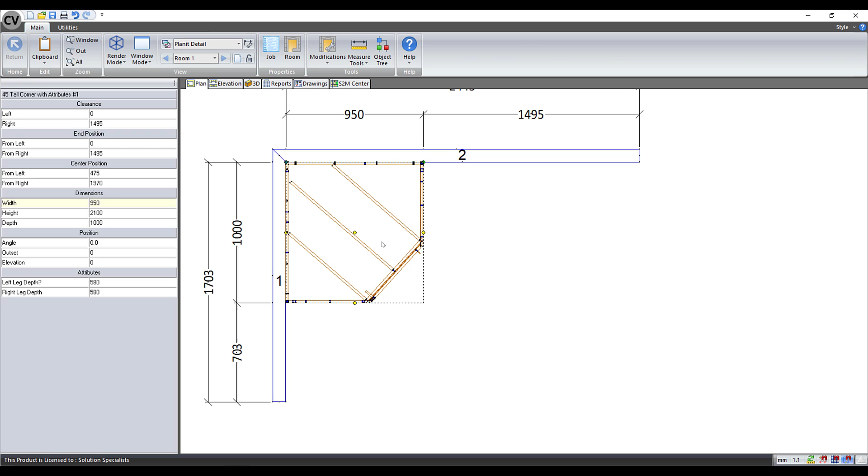Throughout this lesson, take a look at the cabinet properties within our section editor. For this lesson, we'll use our 45-degree pantry, and we're going to recreate a walk-in pantry using those cabinet properties. I'll get back into my cabinet view, go to my section editor, and I'll go to our cabinet properties. You'll see this by going and clicking on properties, and you'll see a drop down appear. For now, I'm going to select general, but just have a quick look and remember some of the names on that drop down list.

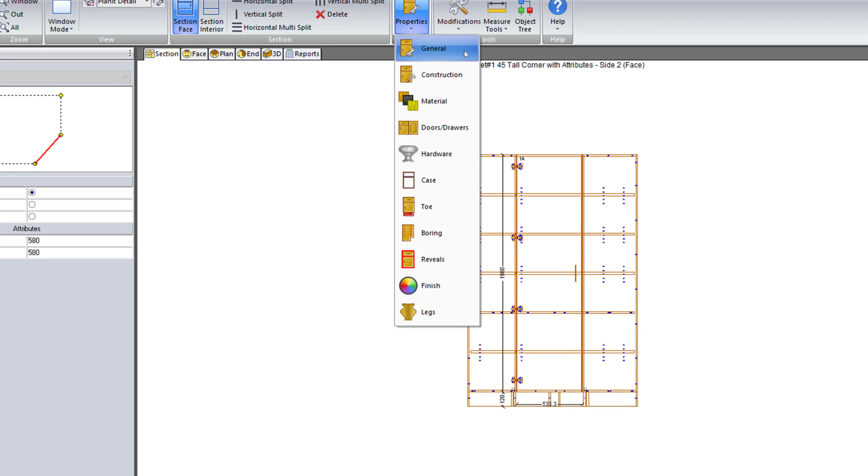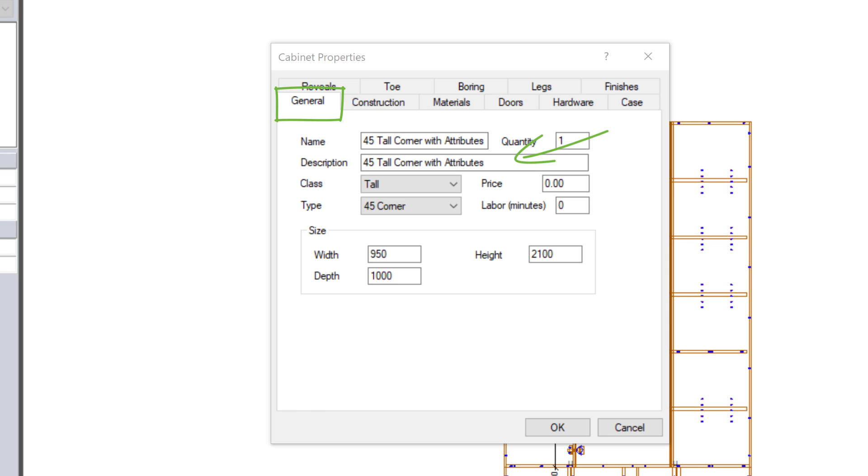You'll see now that I've opened up general, all those same options appear above as tabs along the top of the screen. This means we can swap while we're in this screen or open directly to the tab we want, just to save a bit of time. To begin with, we'll start with the General tab. It's here that we can give our cabinet a new name, a description in the fields here, and we can also talk about what type of class the cabinet is. The class reflects the cabinet class in Job Properties. This will let Cabinet Vision know what height to make this cabinet if we save it away and pull it back out of the library later.

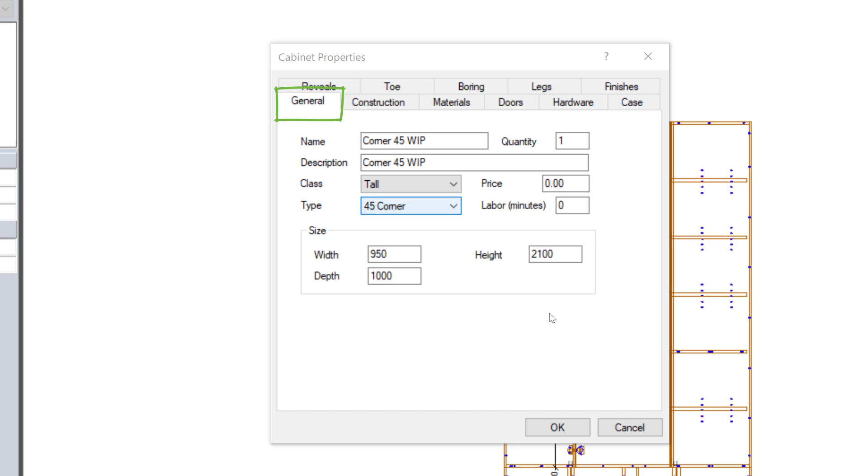You'll be able to also select if it's a normal cabinet, a blind cabinet, a corner 90, or a 45 corner like this one in our type section. This is so Cabinet Vision uses the correct hinging for the doors. You'll see because mine's a 45 cabinet, it's using the correct 45-degree hinges for this cabinet. For now, I'm going to name this my corner 45 walk-in pantry and move on. You can also edit the size here if you wish, though it's always better to do this from the plan or elevation view, just so you know what else is happening around the job when you do it.

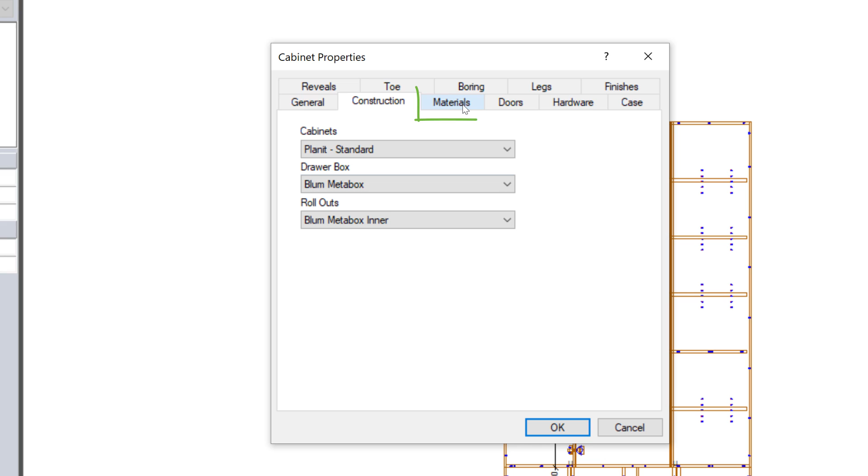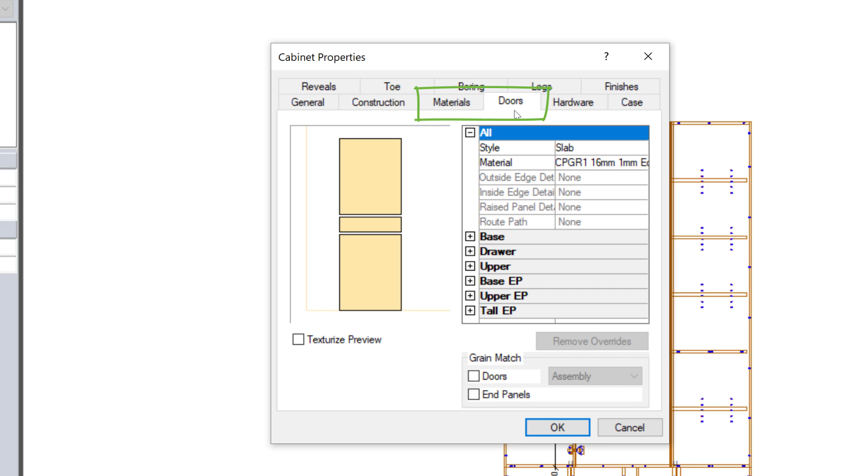In our construction method tab, we can change the construction method of our cabinet or the drawers from what we've chosen as our room or job properties. The material and door tabs is where you can select materials for the cabinet and doors, just like we did back in the job properties. If you're going to save a cabinet away, like we're going to cover in the next chapter of your training, avoid doing this where possible. This is because it will become a permanent change to that cabinet, and you'll find as you pull it out of the library, certain materials aren't going to match the job that you're working in. In our hardware tab, we can also change things like our handles, drawer guides, and hinges for the cabinet. Again, try to do this as little as possible if we're saving that cabinet back to the library.

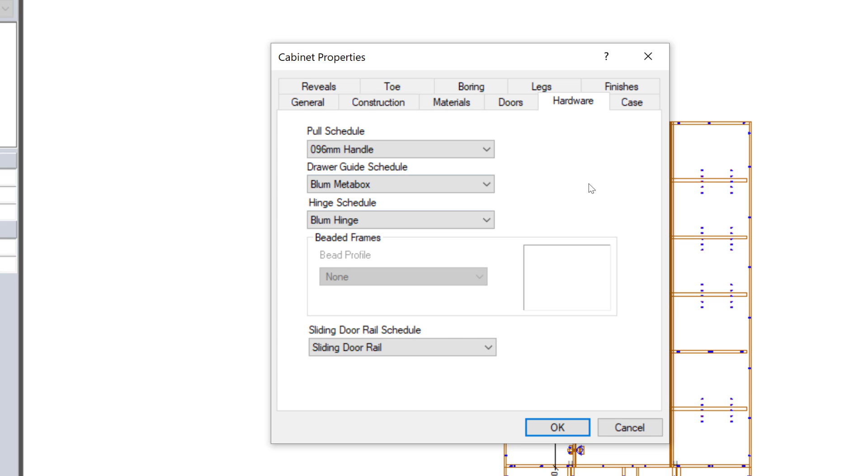Your case tab is where we can make a few changes to the system parts. In this section, we can choose what type of tops our cabinet has, and this is a good tool for changing things over, like having a full top in your base cabinet instead of a rail if you're going to be stacking an oven or something on top of it. Below this, we can tell Cabinet Vision if the cabinet has a bottom or not, and as this is going to be a walk-in pantry, I'll set that to no bottom.

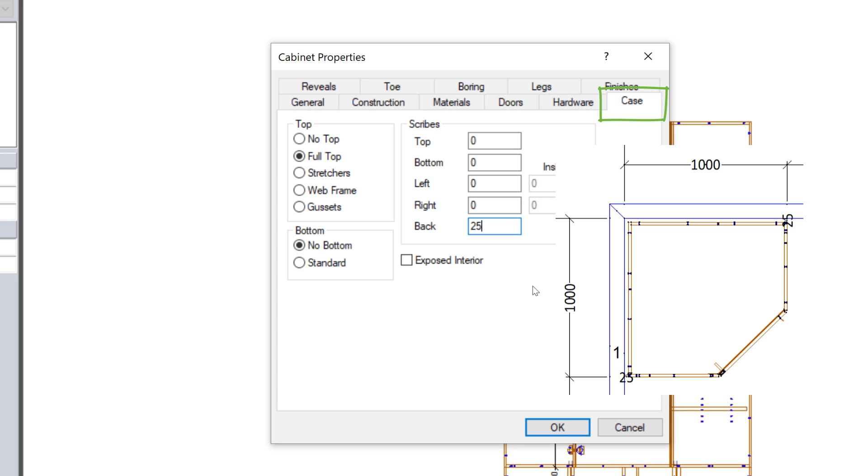The next section is called scribes. However, you're better off thinking of them as voids. Whichever field you add a value to, Cabinet Vision will add a void to the cabinet. For example, I'll add a 25mm scribe or void to the back of this cabinet. You'll see now as I look at it in plan view that my cabinet is now changed to have a 25mm space from the back to the wall. However, the overall cabinet size and the initial amount of space it took up on the plan hasn't changed.

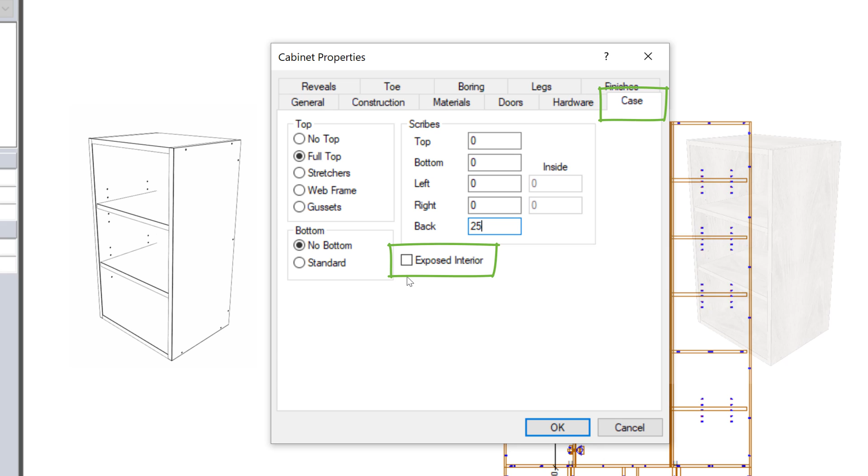Finally, there's a button here to expose the interior. This will change the cabinet to using the color material for the main parts instead of the whiteboard. You'll see here the cabinet on the left has this unticked and the cabinet on the right has it ticked to use the exposed interior.

Our next tab is where the reveals for the cabinet doors can be changed. Reveals are just door gaps. This is where we could change things up for one single cabinet, unlike our full construction method. For this cabinet, I'll leave most of my reveals as is. However, I will just give it a 10mm door gap on the bottom of the door, so that once our kick is gone, and this is sitting on the ground, the door has plenty of space underneath it.

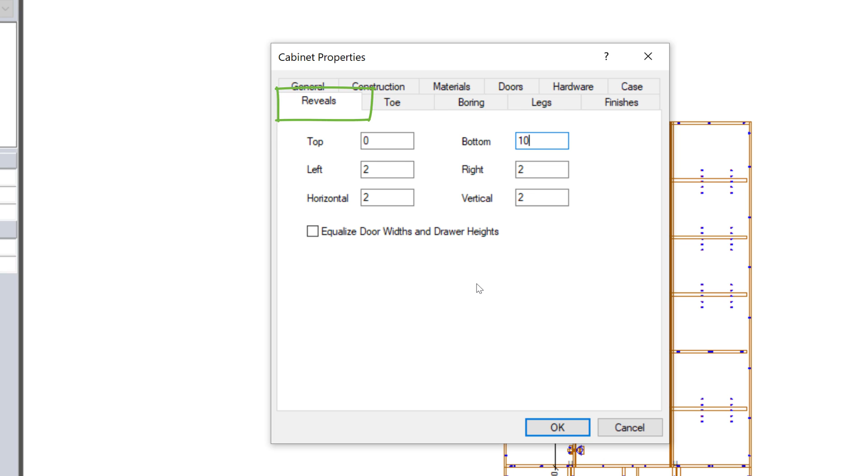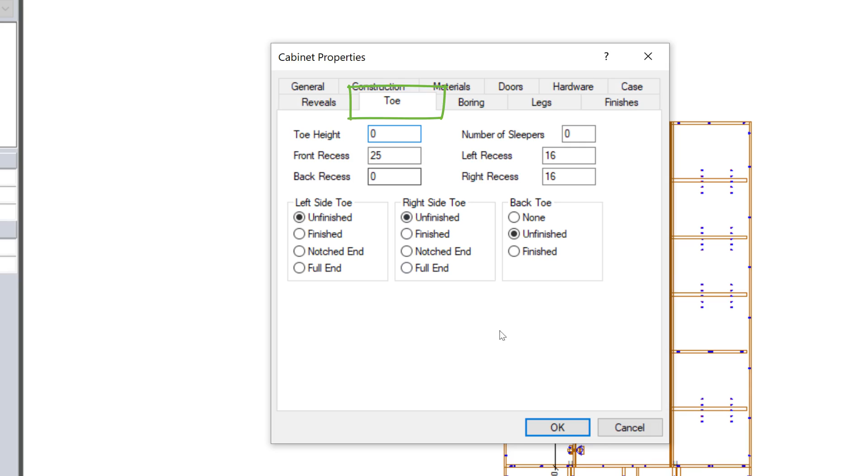The final tab we'll look at is the toe tab. Here we can change the toe height, the front, left and back and right recesses of the kickboard, and you can also set how many sleepers the kick will have. If you want to remove the kick from the cabinet completely, I can simply put in a height of 0 for my toe height. We can now click OK and check out our new cabinet in the 3D mode.

So now we've made your very first walk-in pantry. Get used to these cabinet properties and have a good look around, because when you're going to start saving cabinets away and you're making some custom cabinets, working through these cabinet properties is a great place to start. Have a play around, and once you're ready, we'll jump across and we'll have a look at a few more tips and tricks around this screen, just to make those custom cabinets a little easier to do.